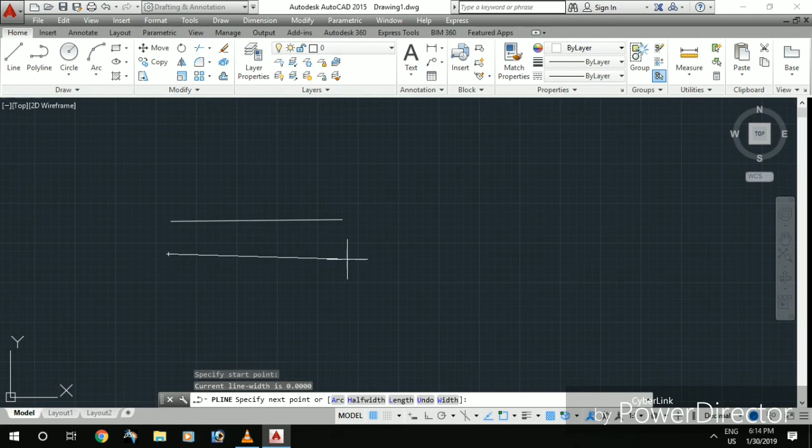First, let's start with the line. A line has a start point and an end point. The shortcut for line is L. The shortcut for polyline is PL, or you can click on the icon. The difference between a line and a polyline is: a line has one start point, an end point, and a midpoint. But in a polyline, if you draw a rectangle, the rectangle gets stretched.

But if you draw a rectangle using line, the edges will be broken so that the line gets separated between the two different points. These are the major differences between a line and a polyline.

I have drawn a square using a line, and I'm going to draw a square using a polyline. In the polyline, we can see that the lines which have been drawn are going to be in a continuous form, so I'm not going to break it. I'm drawing it using coordinate systems, a rectangle coordinate system.

So a line and a polyline, these are two different squares. If I select a line from a square, it moves and gets split. But in a polyline, if I select and move, the line gets stretched. These are the differences between a line and a polyline.

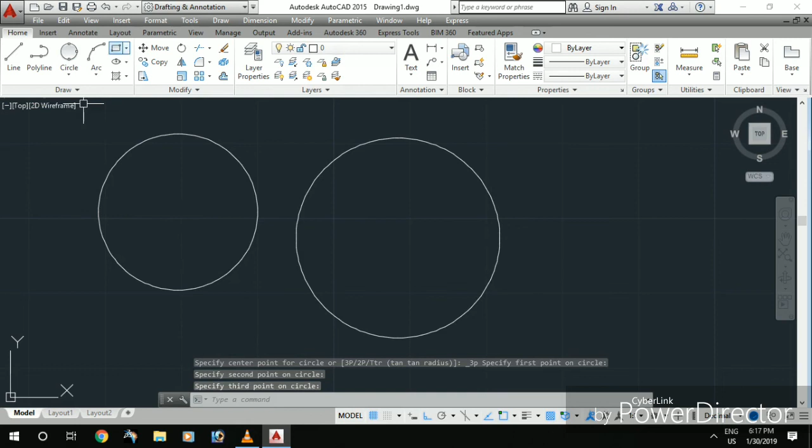2 point is nothing but placing 2 points. 3 point is placing 3 points, clicking three different points. Tan radius is tangential to two different lines with a radius given to draw the circle.

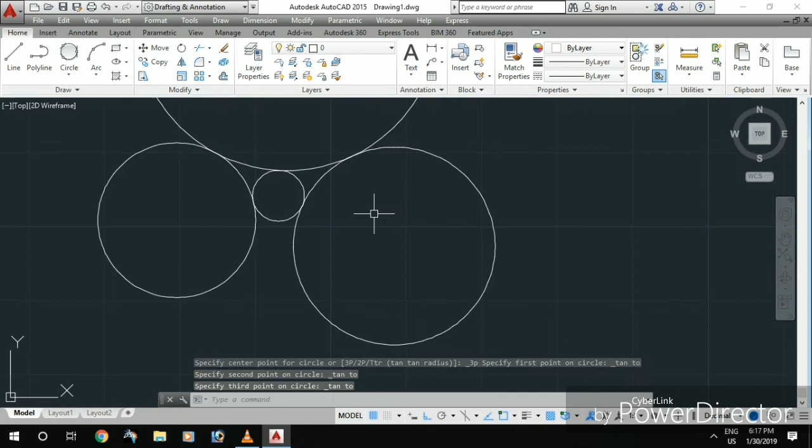These are the various types of circles which can be drawn using the circle command. The circle shortcut is C, and the arc shortcut is ARC.

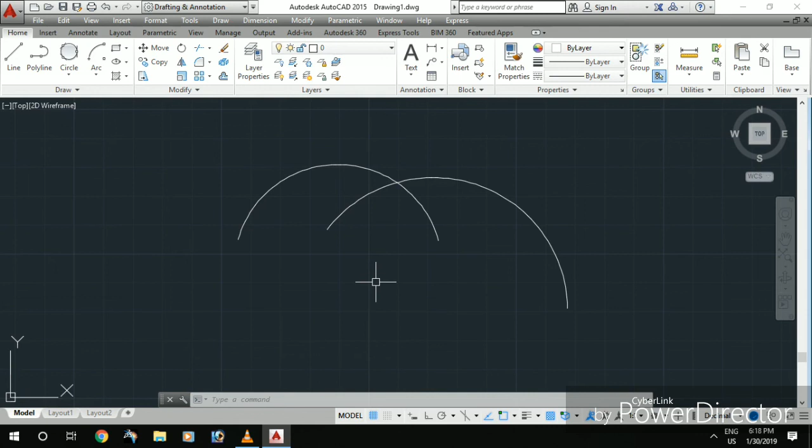In arc there are many different types of conditions. The basic and important arc you've been using is the 3 point arc. The rest of the arcs are like a compass arc: start-center-end and start-center-angle. These are the different types of arcs drawn as usual. But continuous is a command which is different from others. Clicking continuous draws an arc from the arc we finished last, so the continuous arc draws an arc that continues from the previous one.

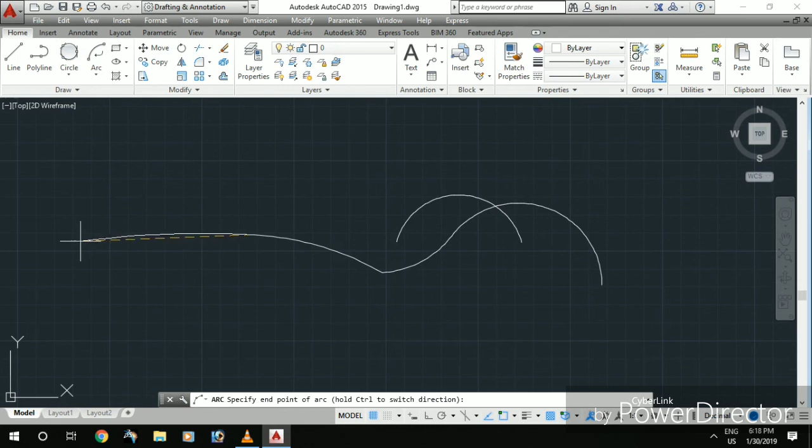Now let's see the rectangle. REC is the shortcut for rectangle. If I'm going to draw a rectangle, I can draw using even a coordinate system. The first point can also be determined by clicking with the mouse. REC is clicking and giving the first point as 0,0, and dimension is the D shortcut for rectangle inside, where I give the dimension for length and width separately. REC is the shortcut for rectangle, and there are many different categories in a rectangle: chamfer, elevation, fillet, thickness and width.

First let's see fillet. Fillet is nothing but making the sharp edge into a round surface. You need to give a radius; I have given a radius of 5. Now the radius is not visible since the condition applied, a 5 fillet, is not able to be produced because the size of the rectangle is too small. If the rectangle's size exceeds according to the condition, the filleted edges will be formed.

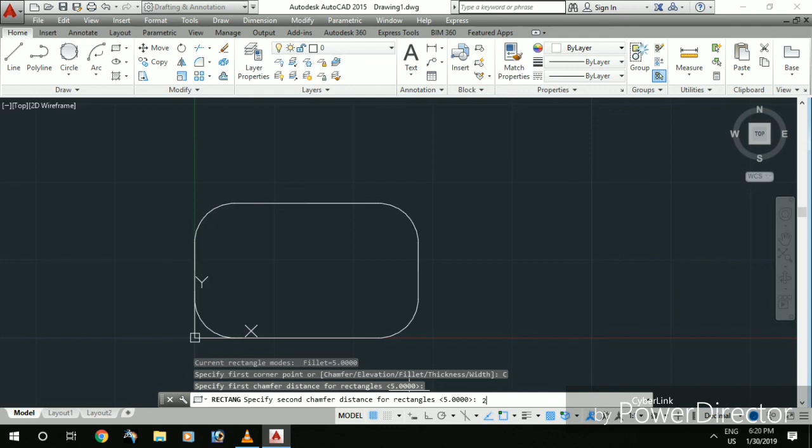Next we are going to see chamfer. Chamfer is nothing but two different points, that is first distance and second distance. The same condition will be applied for the chamfer as for the fillet; if the condition is capable, only then will the chamfer be applied. So REC is the rectangle, and there's thickness, elevation, chamfer and width.

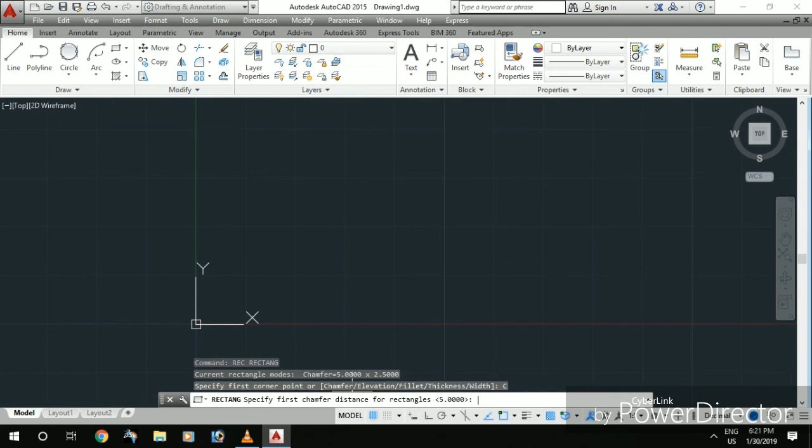First let's see the width. Width is giving a thickness for the rectangle. Now we can see that a chamfer angle has already been applied, so you need to cancel it. Go inside chamfer and select 0,0 for first distance and second distance to remove the chamfer. Otherwise the chamfer command will stay activated even if you have changed it.

So now let's go to width, and I'm going to apply width as 1, and I'm going to draw a rectangle, and you can see that the width has been applied for the rectangle as a thickness as given.

So now let's give thickness. I'm going to give thickness 20. So that's nothing but I'm going to draw a rectangle the same way, but there's no visible difference between the width and the thickness. So let's see what the difference is for the third one.

Third, I'm going to draw elevation. So elevation I'm going to give 50. Elevation is nothing but the same, I'm going to draw it, but there's no change in the visual. So if I need to show these things visibly, I need to go to isometric view.

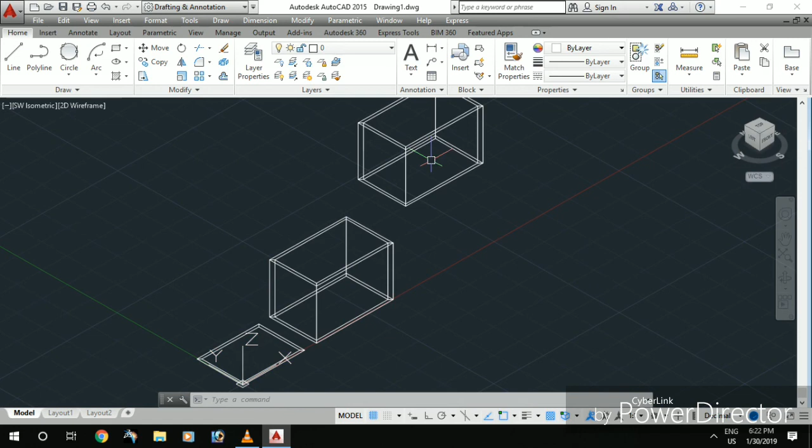So I'm going to click on the isometric view. Now you can see the thickness, width and elevation, and what different things have been applied. The first one has only width, the second has thickness and width, and the third has elevation, thickness and width. The elevation is 50, and the thickness is 20, and the width thickness is 22. So these are the differences in the rectangle.

So now let's see polygon. Polygon is nothing but a command where a polygon with many sides can be drawn. That means a hexagon, a pentagon, or anything can be drawn, with any number of sides given. So sides inscribed in circle and circumscribed about circle play a major role in this.

Inscribed in circle is nothing but the polygon you are giving in a radius, the line which has been drawn, the polygon line which has been drawn will be inside the circle. The sharp edge will be connected inside the circle.

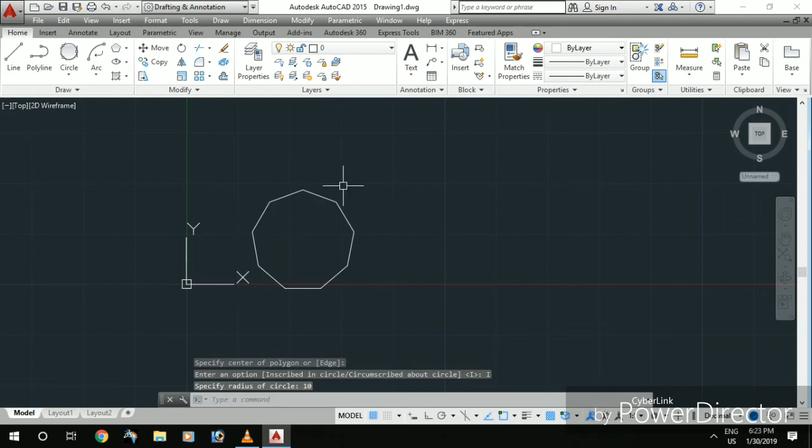So first let's draw it in the center. I'm going to go to the polygon, sides, inscribed in circle. It's going to be 20 or 10, and the radius I'm going to give, and I'm going to draw a circle to show you what inscribed in circle and circumscribed about circle mean, and the difference between them.

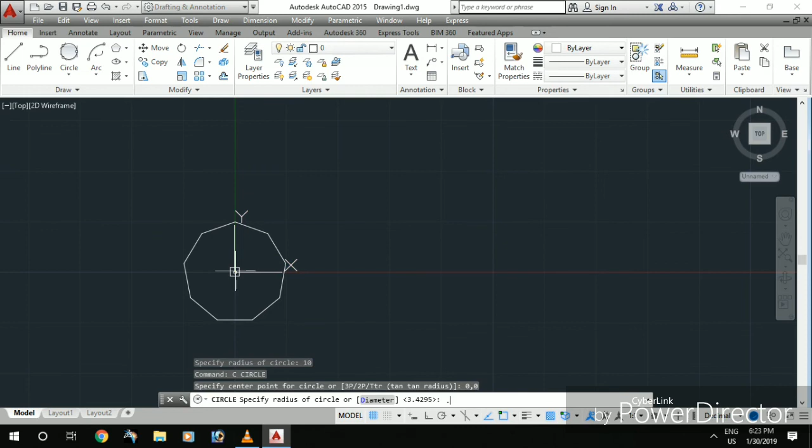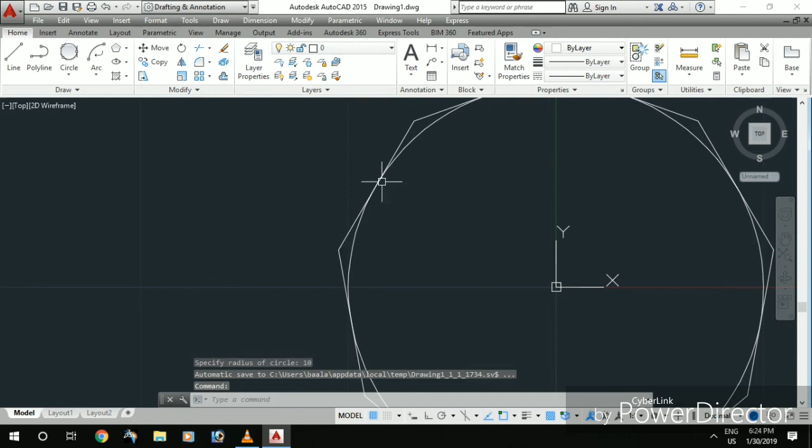So you can see that the sharp edge has been touching the circle. Now let's see circumscribed about circle. The radius is going to be 10, the same as before. Now you can see that the lines have been tangential to the circle. So this is inscribed in circle and circumscribed about circle.

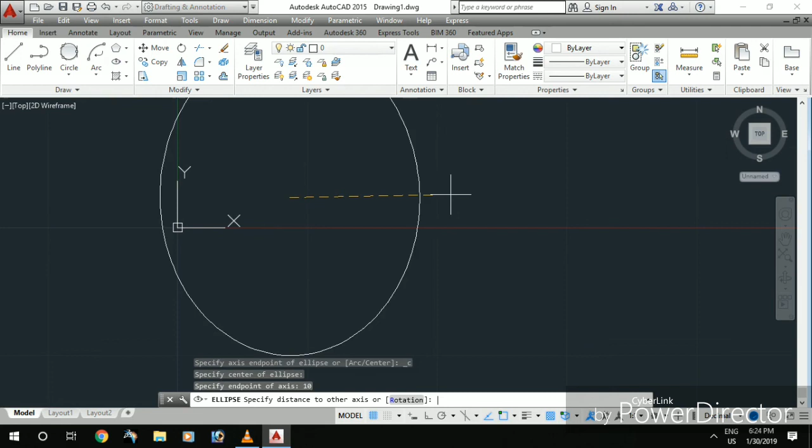So now let's see ellipse. In ellipse there are two different types: center radius, and diameter, that is axis to axis. In center radius, we need to give a major dia and a minor dia. Basically an ellipse needs a major dia and a minor dia to be drawn.

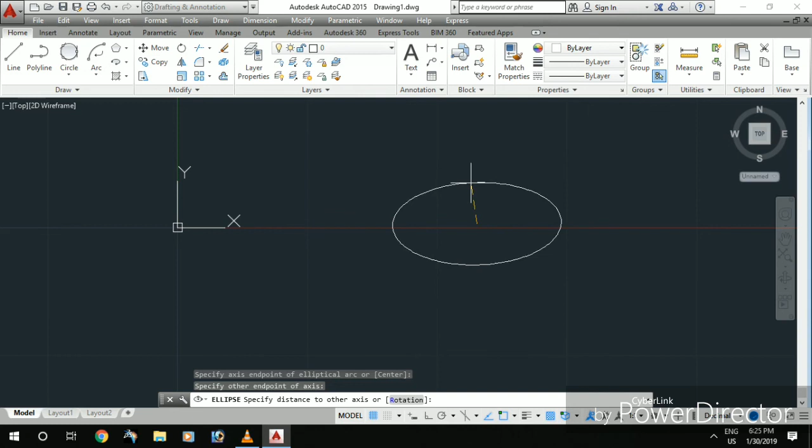Axis to axis is nothing but drawing it from the axis and giving the major dia and minor dia. In elliptical arc, we need to select axis to axis, major dia and minor dia, and select the starting point so that you can draw an arc in a fluent manner along the major dia and the minor dia.

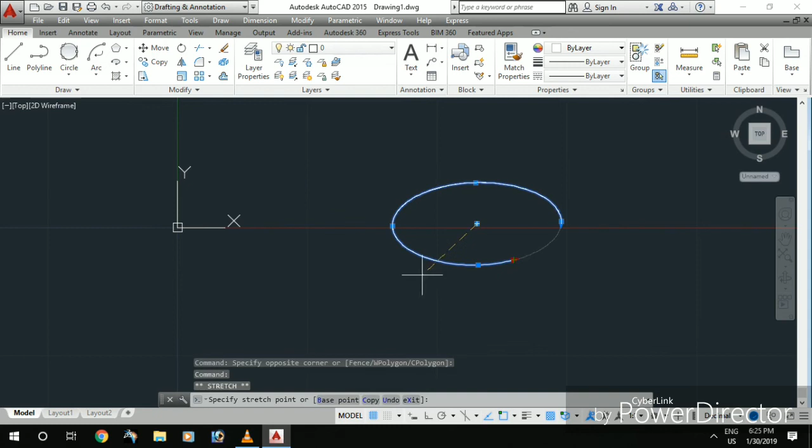It can also be extended by selecting the ellipse, so it can also be adjusted. So these are the drawing tools which have been majorly used, and hatch will be followed in the next video. So now let's see the modification toolbar.

So now I've drawn a rectangle, but the commands which have already been used are still activated, so I'm just going to cancel it, cancel the width, thickness and elevation. I need to go inside and make it 0. So now it comes as an ordinary rectangle.

So this is a rectangle. Now let's draw a single rectangle, a bigger one, and I need to place a circle in that. So in this I'm going to give the specification of the area. This way we can even specify the area for a rectangle.

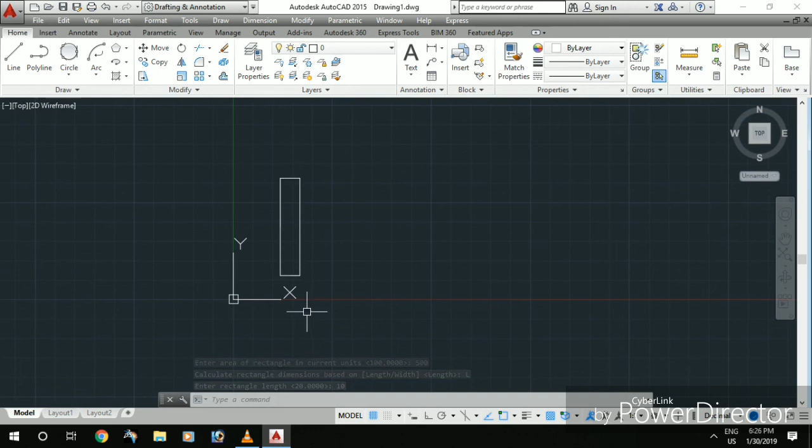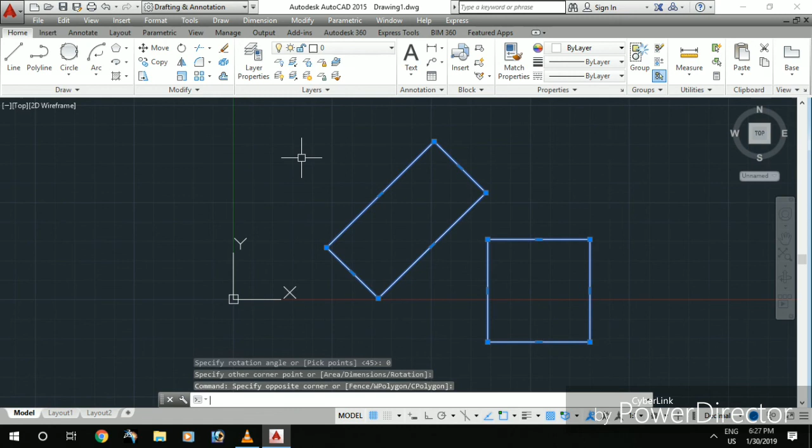In rectangle I'm going to just place the point, and you can even rotate the rectangle at whatever angle you like. So these are the possible ways of rotating the rectangle. If you need to make the rectangle normal again, go back and click on rotation 0. So these are the different ways you can draw a rectangle.

So in draft setting, I'm going to adjust the graph. For it, x is 10 and y is 10, I'm going to make it x and y 1, 1. So now I'm going to draw a rectangle.

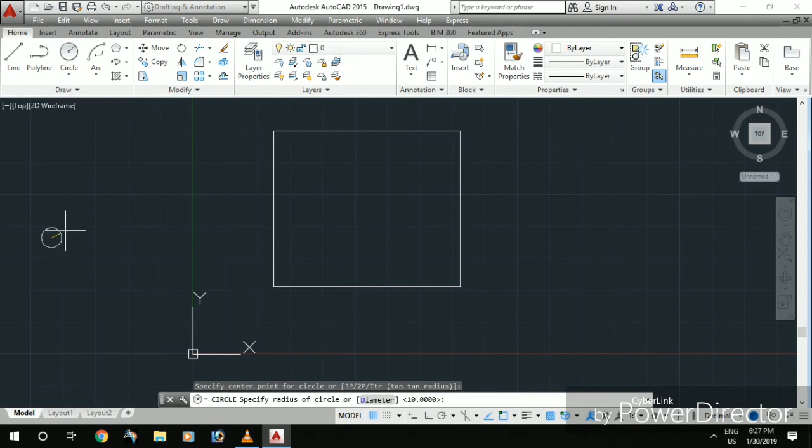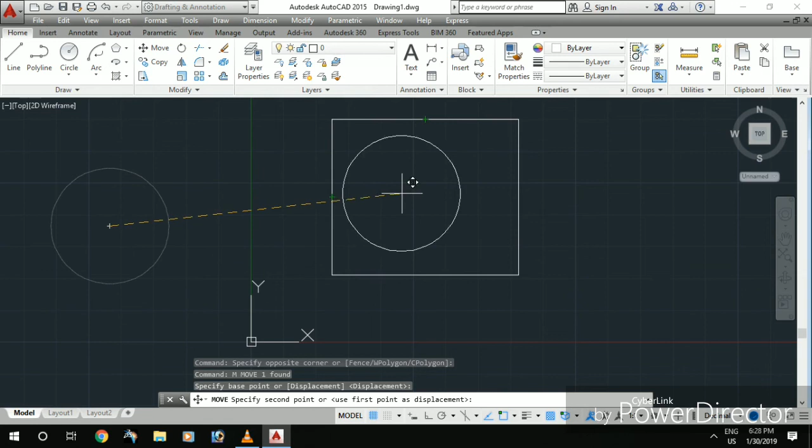Now a circle which has been placed should be moved inside the center of the rectangle. I'm going to select it and click M for the move shortcut, set the displacement to nothing, from 0 to 0, then select the base point as the circle's radius center, and move it into the center where the points coincide.

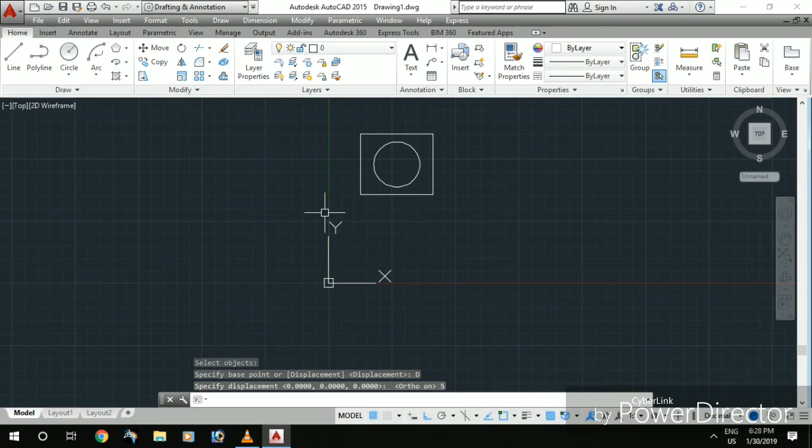In case you want to move the rectangle itself to a 5mm height, click on move, M shortcut, click displacement, go to ortho mode F8, and give 5mm so that the rectangle moves 5mm up. This is how you can move objects using displacement.

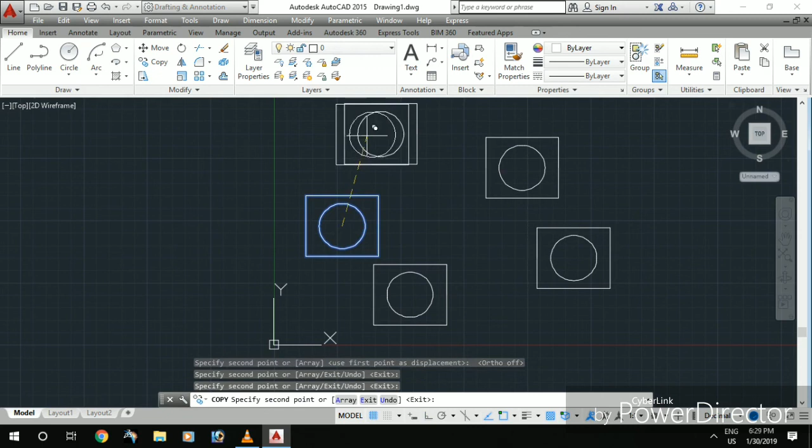If you want to copy, select the object, Ctrl C is the shortcut, and place it. Or if you want to place it multiple times, select the object and go CO, the copy shortcut. You can even click on multiple, and the displacement command is the same. Multiple lets you place it wherever you want with multiples of the rectangle. This is the copy command.

To see the stretch command, just draw a line, click on the line and click on the end point. You have the stretch command, click it and you'll be able to move or extend the line. That's the modification toolbar.

Now let's see a really important topic, called quick select. QSE is the shortcut. The quick select dialog box appears and you can select drawings, current drawing, and entire drawing, or select objects within them.

The object types include circle, polyline, and so on, and you can select circle. You can even apply conditions for selecting a particular circle and click OK. If you give conditions like equal to, and there are no matching circles, nothing will be selected.

Let's go to QSE, click on circles, and click OK so every circle gets selected. I haven't applied any conditions since I don't know the radius of the circle, so I'll just select it and change the property for everything.

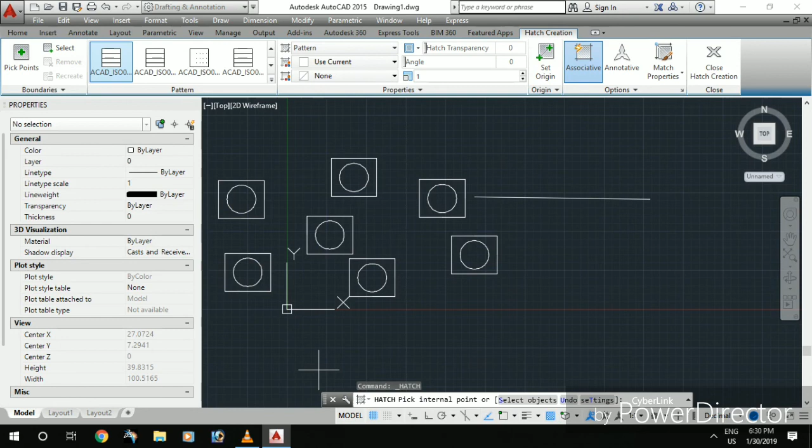The property shortcut is Control 1. So: quick select, circles, Control plus 1, and set the radius to 2. The radius of 2 has been applied to all of them.

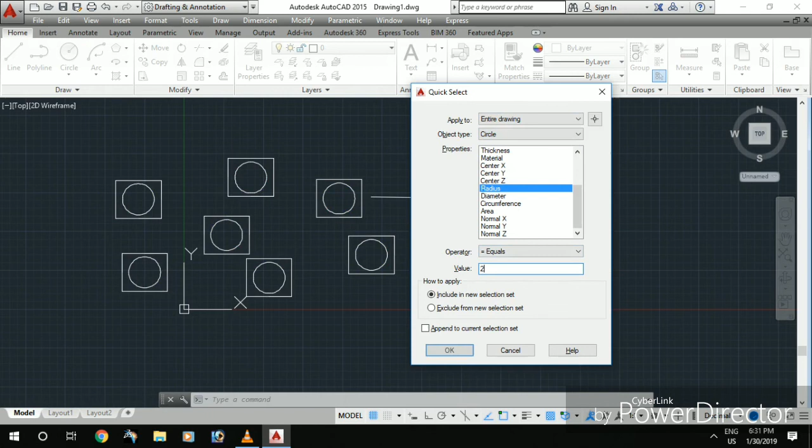Go to QSELECT quick select, then to circle, then to radius, set the property condition radius equal to 2, and click OK. All the circles with radius 2 will get selected. This is a major way to make a quick selection in a project efficiently.

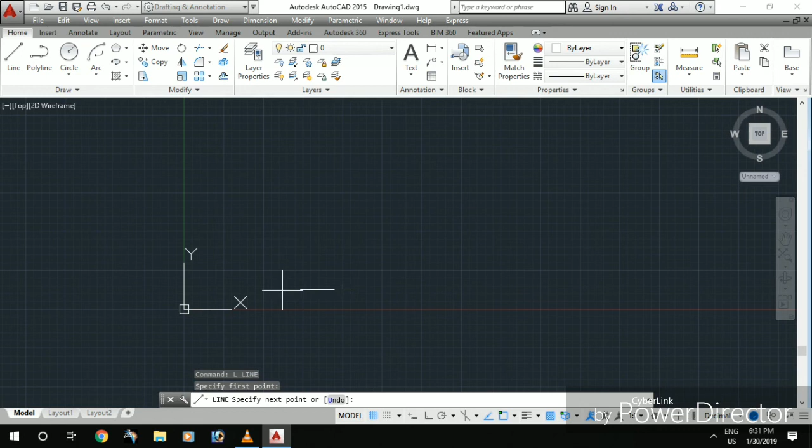Now I'm going to draw an I-section, an easy way to draw it. I've just drawn a quarter of the side of the I-section.

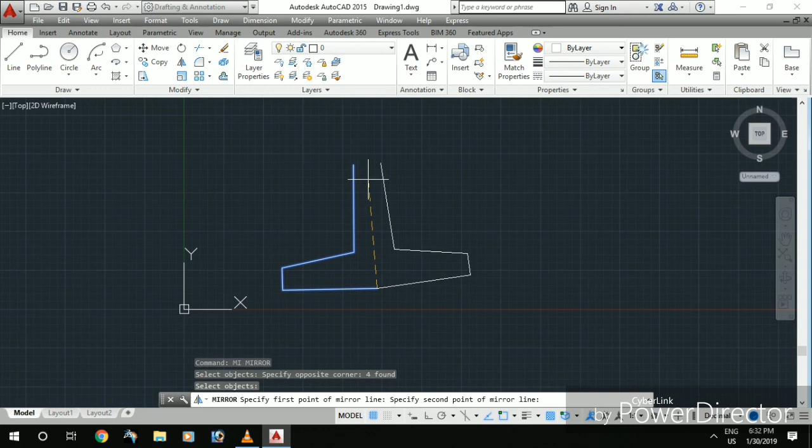I'm going to select the whole object and use the mirror command, shortcut MI. I'll draw a first variable point, a reference line to mirror around, using ortho mode so it's straight. Then there's a yes or no option for whether to delete the source object—I chose no, so the source object was not deleted.

It's possible to mirror not just in a parallel way but also in a perpendicular way. I select it, use the MI shortcut, draw from one point to another, and give no to avoid erasing the source object. This is how you mirror an object from one part to another side.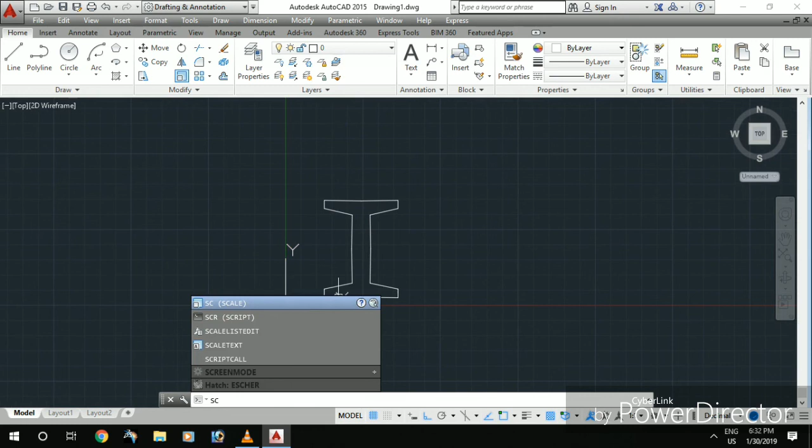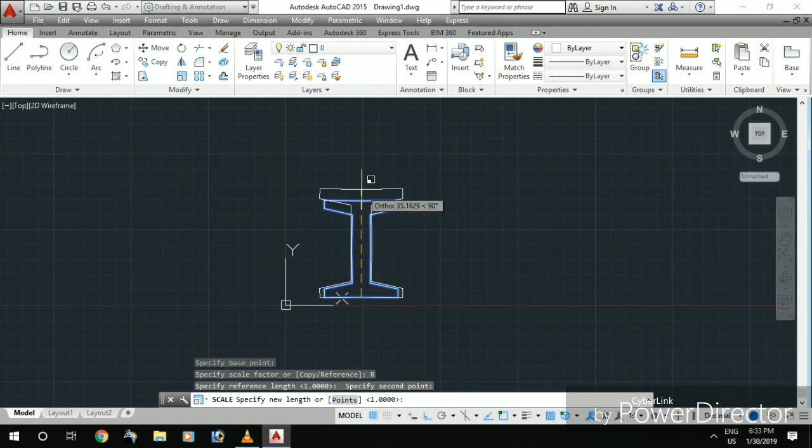Scaling uses SC as the shortcut. Select the object, select a base point and click it, so you can increase the size according to distance. It's hard to scale precisely by eye, so I use the reference command so it can be increased gradually and accurately. After clicking, the dimensions and size of the object will change.

I go to the scale command, select the object, place the base point, and place the reference from bottom to top, then decrease and increase the size accordingly.

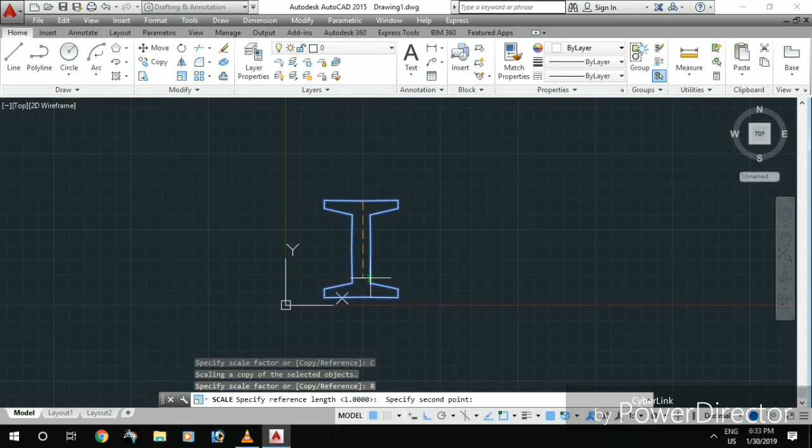There's another way: select scale, select the base point, click copy, then click reference. I click the reference from top to bottom and decrease the size—since I used the copy button, another object gets formed as well.

So these are the ways you can use the drawing and modification toolbar.